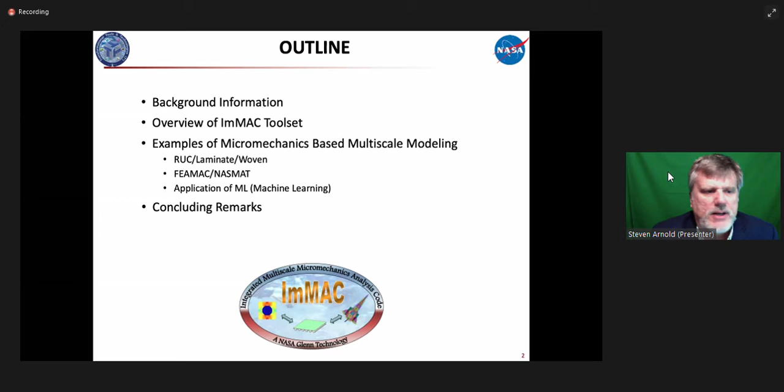According to a 2016 multi-sector industrial survey, material innovation is essential to top performing organizations, as they rated new materials as one of their most important factors in their ability to meet their innovation goals, particularly, as you can see, in the area of performance and cost.

Yet, unfortunately, historical material development times required to move a material from conception to full deployment have been shown to be on the order of 20 years, regardless of the material class. Therefore, in recent years, there's been a desire to reduce this time frame dramatically in order to increase U.S. competitiveness.

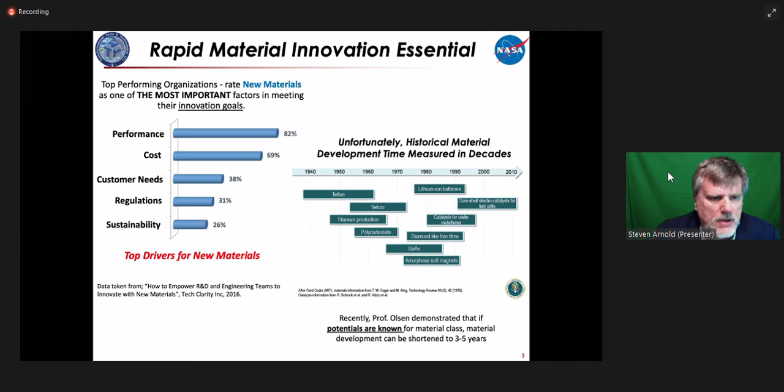To that end, people have turned to ICME over the last 15 to 20 years in an attempt to speed up innovation, since ICME integrates processing histories which influence internal structure, which in turn drive properties, and which then drive performance of the component and structure.

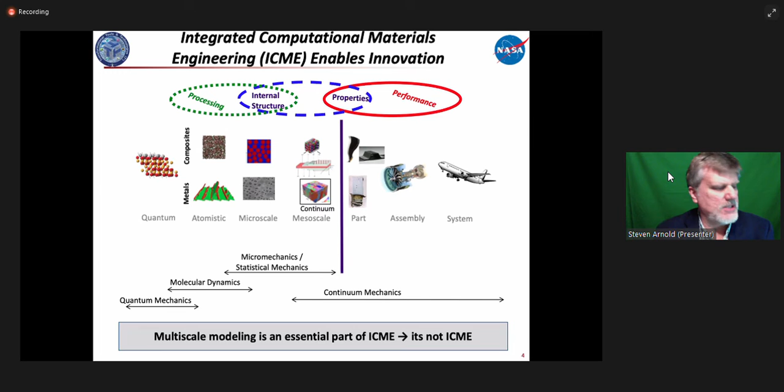ICME is an approach to the design of products and the materials which comprise them by linking experimentally validated material models at different length scales. Multi-scale modeling is an essential part of ICME, but it's not really ICME, in that ICME requires iteration or optimization of the various scale-specific features to obtain one or more engineering performance metrics.

Further, ICME attempts to marry two non-mutually exclusive viewpoints or paradigms. The first is what I term the traditional structural viewpoint, or the design with the material approach, where you're given known properties of the material, and from that you design the component or structure,

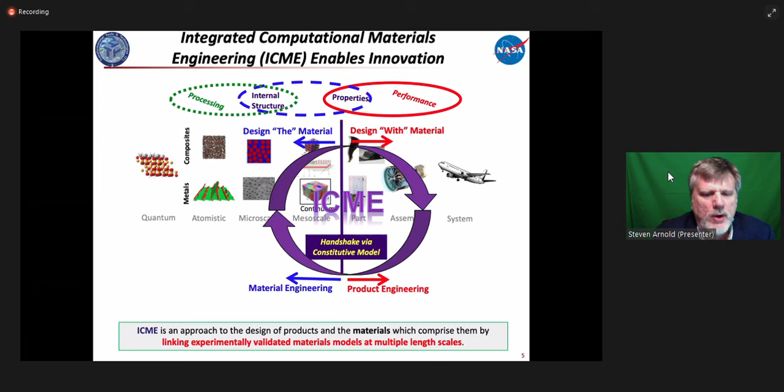versus a more science or material viewpoint, which is the design the material approach, wherein given specific performance requirements, a new material is designed that's fit for purpose. The handshake between these two views is really the constitutive model, and the parameters and properties associated with the various materials then influence the design of the components.

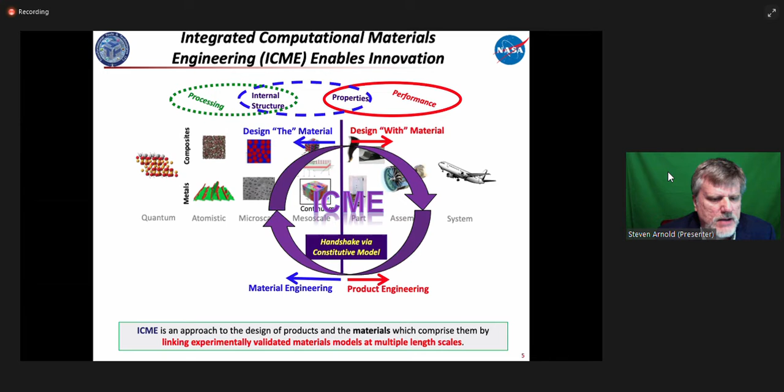More recently, NASA has put together a 2040 vision, which espouses a public-private investment strategy for the design of fit-for-purpose materials and structures. This 2040 vision report is a community consensus document that addresses the technologies required to perform integrated multi-scale materials and structures modeling by the year 2040.

The study engaged over 400 academic, industry, and government experts and aims to explicitly marry the design of materials with the design with materials approaches into one concurrent transformational digital paradigm. The document, which can be found at the URL indicated in the center of the slide here,

describes a cyber physical social ecosystem that impacts the entire supply chain to accelerate concurrent design, development, and deployment of materials and systems throughout the product lifecycle for affordable, producible aerospace applications.

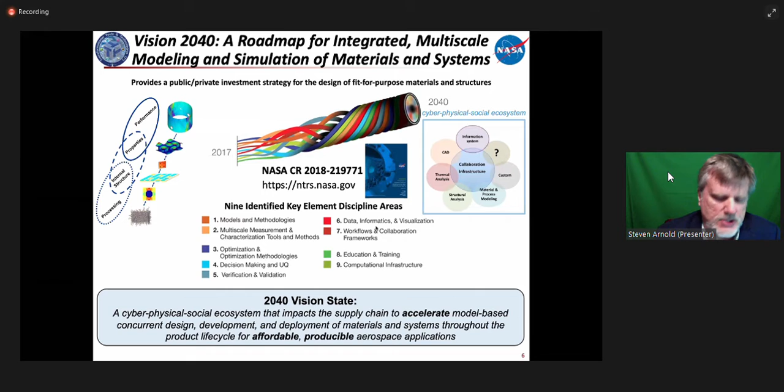Another large investment area in product development is in the area of testing. Consequently, the objective is to build a robust, validated computational framework that can provide accurate virtual testing in order to achieve significant cost savings throughout the development and certification process.

Such a framework is particularly important when dealing with composite materials, as the amount of required testing at levels 1 through 4, as you can see here, is significantly increased. Notice 5x and 100x in levels 2 and 3 over those associated with metallic materials or structures.

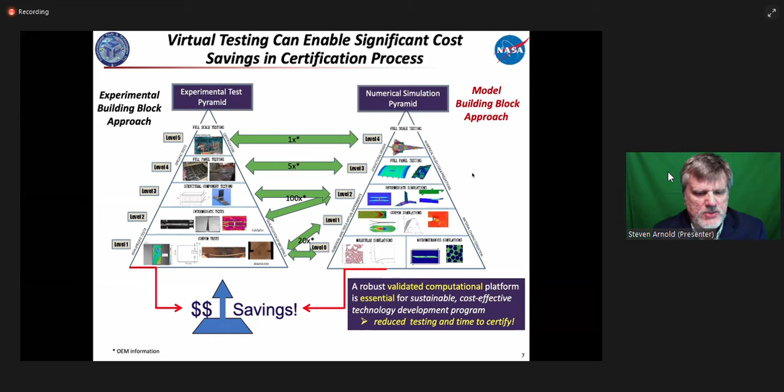So to accomplish this speed up, we really require the development of a new model building block approach, consistent with the classical experimental building block approach, thereby hopefully allowing us to minimize the amount of actual testing required during those intermediate stages of testing, like levels 2 and 3, thus resulting in significant savings of both time and money.

As a result of these motivating factors and many others, NASA Glenn has been pursuing the development of a robust composite multi-scale framework. In particular, we've really focused on the balance between model efficiency and fidelity. Here I'm showing three different categories of multi-scale models.

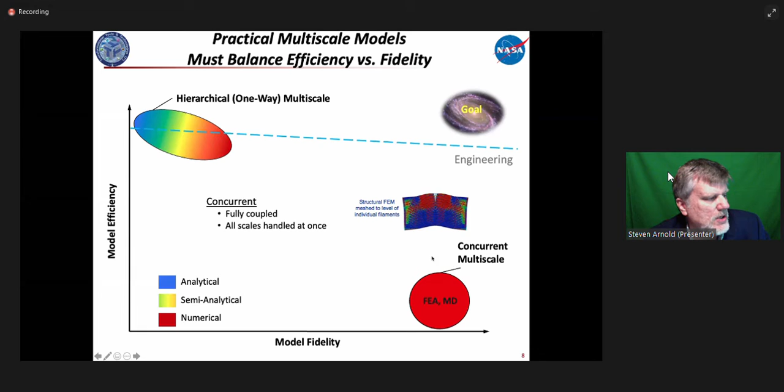The first one here is the hierarchical multi-scale approach, which is really uncoupled. It's one way, either bottom-up or top-down. Typically it's very engineering oriented, where for engineering purposes we're more interested in efficiency and we assume a certain level of fidelity. Alternatively, there's the concurrent multi-scale approach, which is fully coupled. All the scales are handled at once.

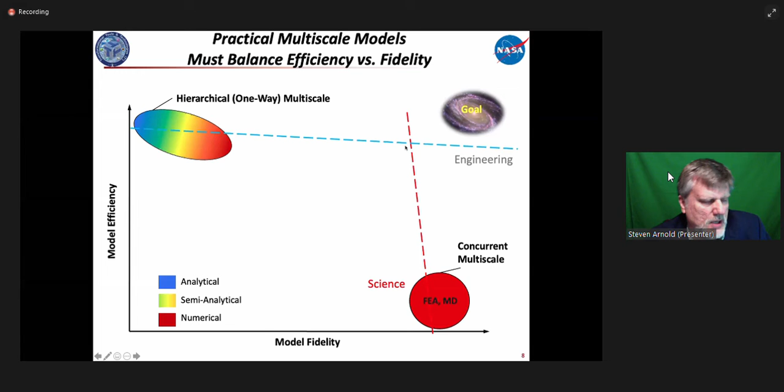And this is much more of a science-oriented viewpoint, where again fidelity is more of the objective, and speed is taken to be a little bit less important. And then there's a third, which is what we have really focused on, and we've termed this the synergistic multi-scale, where we try to take the best of both worlds.

And here we're doing fully coupled, but it's hierarchical in space and concurrent in time. And this is very applicable to the research and technology area. And here I'm just illustrating that in our opinion, GMC or the entire family of method of cells actually is very efficient, as well as has a significant level of fidelity, and serves our purpose.

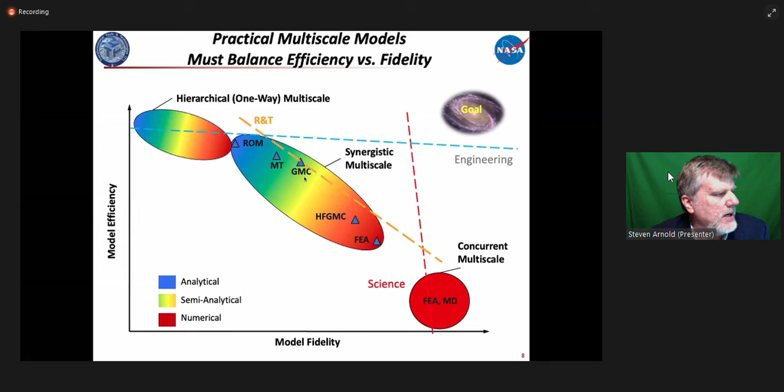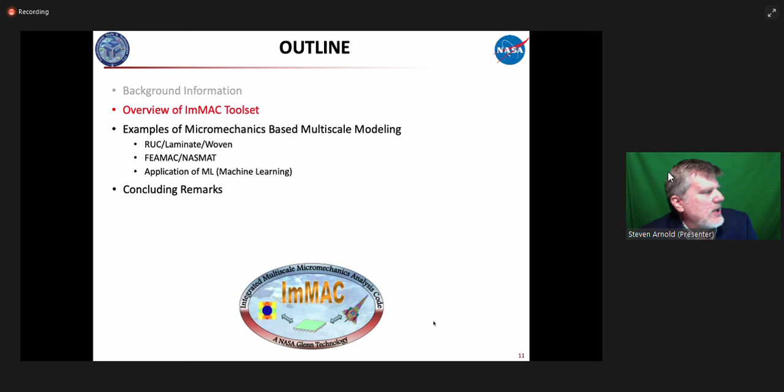So let's just take a quick overview of the ImMAC tool set. Here you're seeing the various scales that are associated with composite analysis. We start at the microscale, the mesoscale, and the global scale, and we're showing homogenization and localization, where homogenization takes you up the scales and localization takes you down. And we're indicating our 4 tool sets here.

We have the MAC/GMC standalone code, which involves classical lamination theory, and it also has a multiscale GMC kind of recursive algorithm built into it. HyperMAC is the implementation of MAC within the commercial software code called HyperSizer, and FEAMAC and NASMAT, as I'll describe later, are the implementation of MAC within a finite element framework.

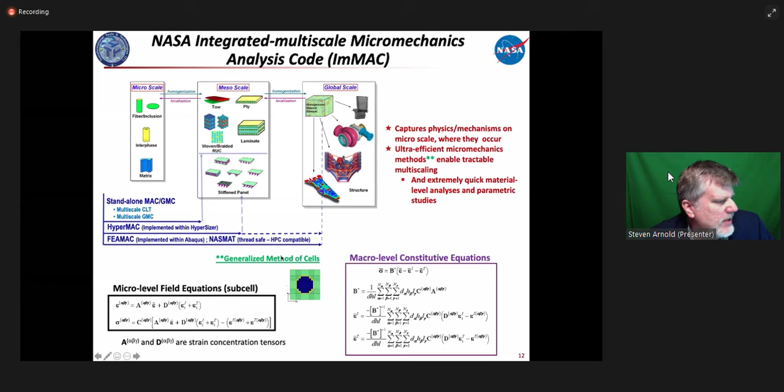And clearly, we have, as I indicated, chosen the method of cells family of micromechanics theories to be the backbone of our multiscale framework. And here we're just showing that the nice thing about this theory is that we have macro level constitutive equations that are semi-analytical, and micro level field equations as well that describe the local fields within the various constituents.

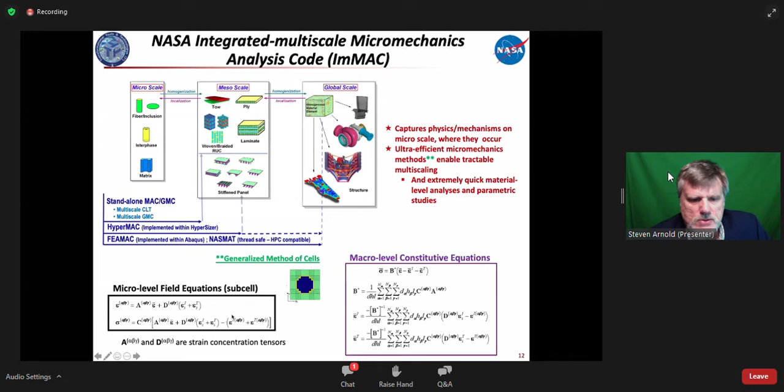And all of these are able to be obtained once we have the A and D strain concentration tensors. Furthermore, an advantage of, like I indicated before, the generalized method of cells is that it admits nonlinear constitutive and damage models. And in this slide we're just indicating that we've built in a large variety of constitutive models as well as damage models within our tool set.

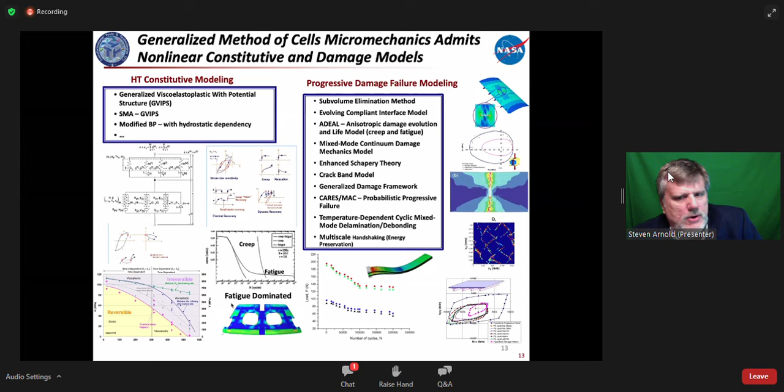This formulation provides constant stress and strain fields in each subcell, and yet because of the discretization of subcells, we're able to pick up gradients within, let's say, the matrix or even the fiber. One of the advantages of GMC, though, is that it has no discretization sensitivity for a fixed RUC, but a disadvantage is that it also has no normal and shear coupling.

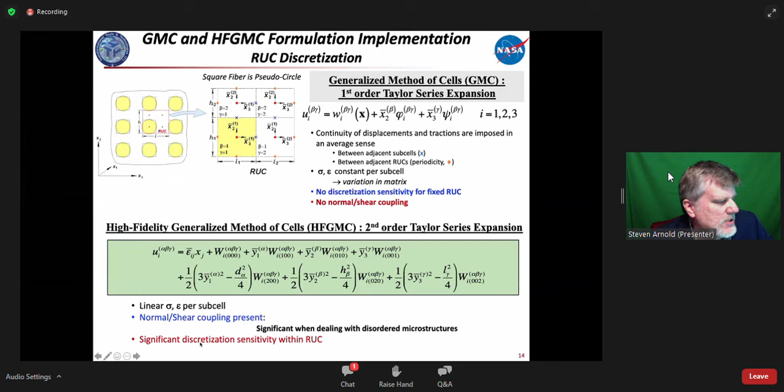Alternatively, the high fidelity generalized method of cells is based on a second order Taylor series expansion of the displacement field, which provides us with a linear stress strain representation per subcell, and actually allows us now to have normal shear coupling, which is really significant when you're dealing with disordered microstructures. A disadvantage, though, of this methodology is that, like finite element, you would have a discretization sensitivity within the RUC.

For more information about the theory and the details that go into that, I recommend you take a look at our 2 books, Micromechanics of Composites, and our most recent book that will appear this summer called Practical Micromechanics of Composites.

And also, just a note, this book is actually going to have a MATLAB open source code that complements it and provides access to Mori-Tanaka, method of cells, generalized method of cells, and HFGMC, and it can be obtained at this link here, which is NASA's GitHub page.

Okay, so just to give you a quick 30,000 foot view, the ImMAC suite, as we said, has a core micromechanics capability. It's very modular. We have both GMC and HFGMC, as well as PHFGMC, which is a parametric formulation of HFGMC, CUF, Mori-Tanaka, and we can even allow any other micromechanics theory to be implemented. And this is done within a kind of a recursive algorithm.

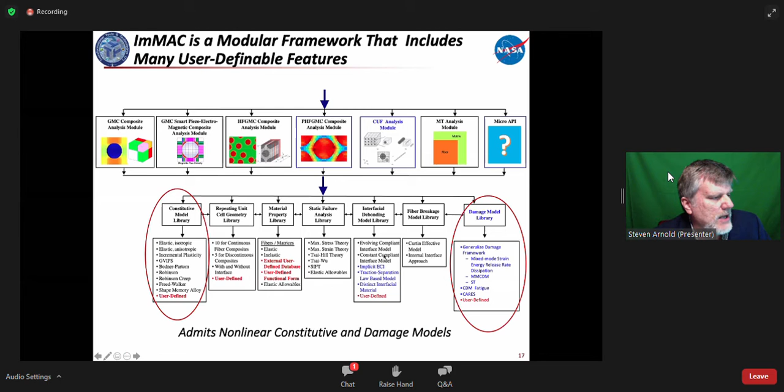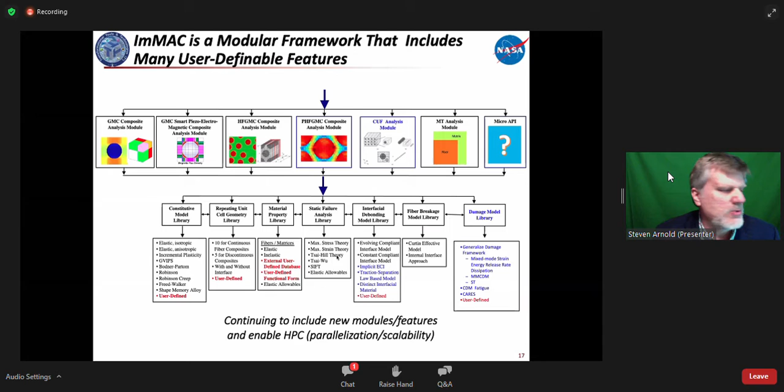And each one of these micromechanics theories can pull from a library of constitutive models, repeating unit cells library, the property library, static failure analysis, interfacial debonding library of models, fiber breakage, and damage models. And we're continuing to include more modules all the time. And our most recent tool works on a high performance compute platform.

The legacy tools now are like MAC/GMC. It basically just calls the generalized method of cells and the high fidelity generalized method of cells, but it can have multi-axial loads applied at a given material point, or you can do micromechanics based laminate analysis with the MAC standalone.

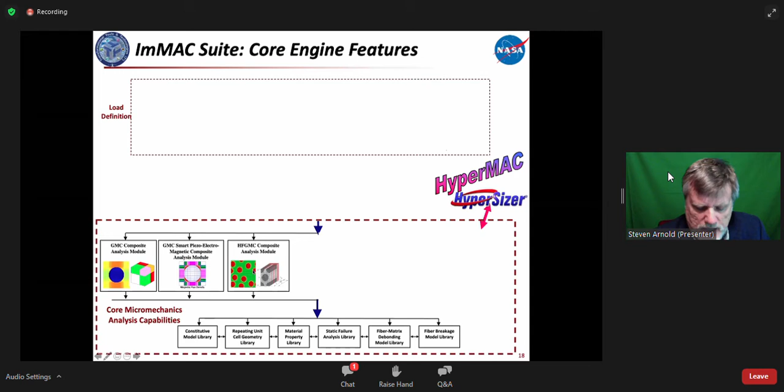HyperMAC, like I said, interfaces with the HyperSizer code, and it basically calls just GMC or HFGMC as options. FEAMAC is our legacy implementation within Abaqus that runs on a single CPU because FEAMAC was not thread safe.

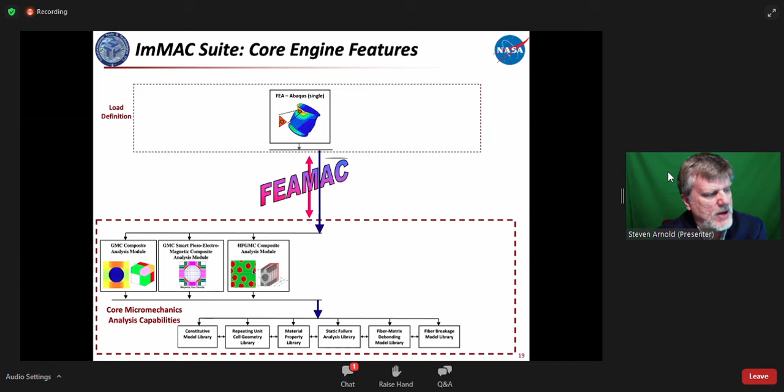And our most recent and advanced tool set is NASMAT. NASMAT can interface with any given third-party software through the macro API. We've so far connected it with Abaqus, SPAF, and CalculiX, which are other finite element codes. And it has the ability, which is quite unique, I think, to recursively engage any given micromechanics theory at any level within the analysis. And you'll see some examples of this coming up.

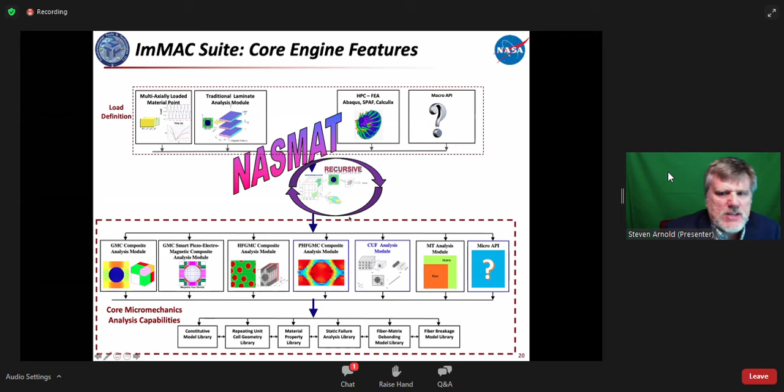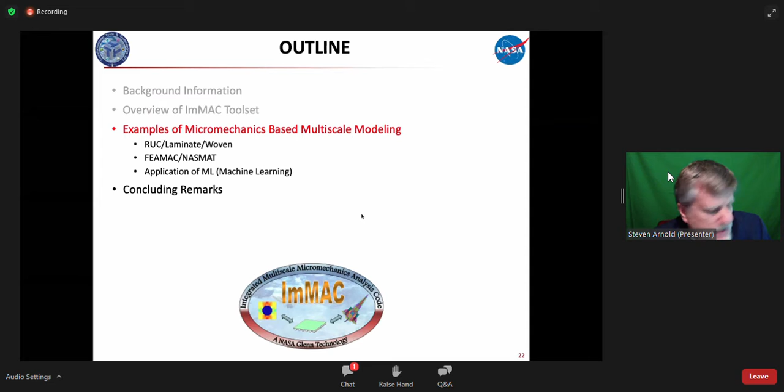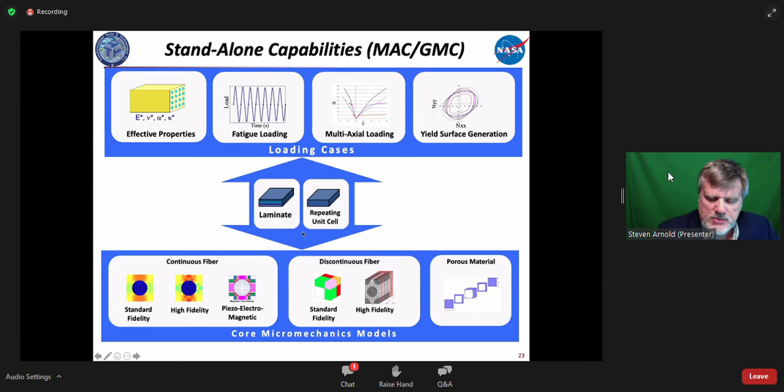Now let's move on to some examples to show you some of the benefits of the tool set. Here we're mainly illustrating the MAC standalone capabilities with respect to laminates and wovens. Although all thermal-mechanical effective property components can be predicted, here we're only showing three, E2, G12, and Nu23, for two different PMC systems, a glass epoxy and a carbon epoxy system.

Here you see the results shown for Voigt, Reuss, Mori-Tanaka, method of cells and three different RUCs using GMC, and all do a pretty nice job. At least the method of cells, Mori-Tanaka and GMC match experiments quite nicely, whereas of course Voigt and Reuss are more on the bounds here.

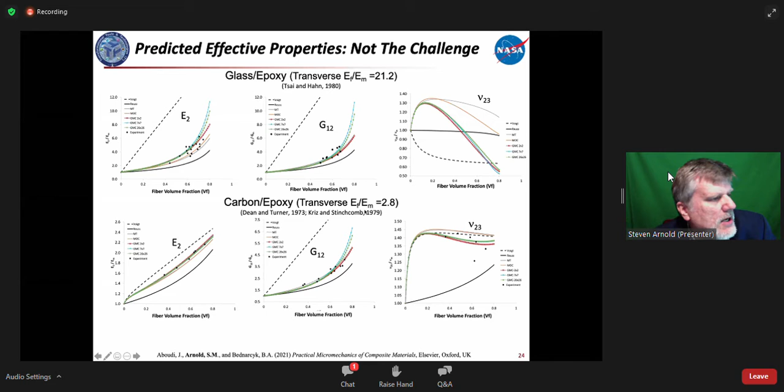Okay, so let's touch on the power of micromechanics, and that is that it provides access to the local stress states and stress and strain fields. Here I'm showing the two invariants, von Mises and pressure, with a finite element representation as well as GMC and HF. For simpler mean field type methods like Mori-Tanaka, you only have a single value in the fiber and a single value for the matrix. But here you can see GMC and HF represent the gradients within the constituents quite nicely.

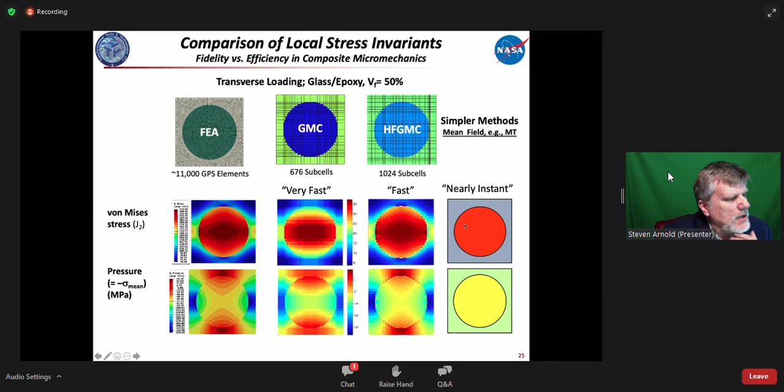And getting back to this balancing of fidelity versus efficiency, here you can see we rank GMC as very fast relative to finite element. HF is fast, and obviously the simpler methods are nearly instantaneous. But again, they only give you a single point value within each constituent.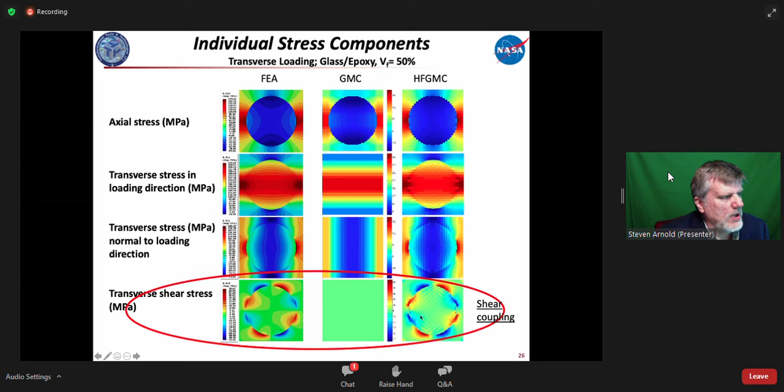And again, we're pointing out here that there's no induced shear stress due to that normal transverse loading. Whereas in FEA and HFGMC, you do actually see shear, but obviously the average of that shear is zero, and does agree with GMC.

So now with those local fields, we get to look at failure and obviously deformation and failure. And here I'm showing initial failure surfaces, which are margins of safety here, and I'm showing it for two different types of problems. Here's one, the SiC/SiC BN system, where the yellow represents an interface material, the BN interface material, and here we're just showing a margin of safety curve.

The green here doesn't have any interface. That is, the yellow's material properties are the same as the green. Here, the blue shows what happens when you do include an interface, and yet you're not allowing it to actually fail. So obviously, because of the compliancy, it's providing you a smaller surface. But when you allow the interface to then fail, you're getting a very sharp failure along that transverse direction.

And it's significantly underneath. But one of the nice things here is you can see the different failure criterions in the different domains, and also we can pick up with micromechanics, because we have access to local fields, which phase is actually failing. Here it's the matrix, here would be the interface.

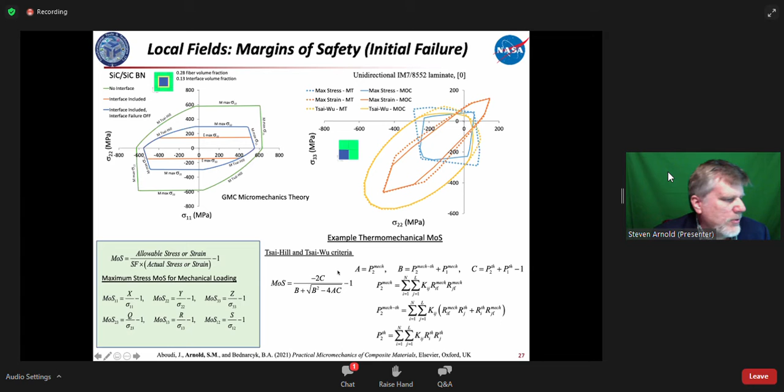And then now here on the right is a demonstration of similar margins of safety curves, but here we're showing three different surfaces, where the blue is a max stress criterion, the orange is a max strain, and the yellow is a Tsai-Wu. And the difference between the dotted and the solid lines is the difference in micromechanics theories, where the dotted are Mori-Tanaka and the solid is method of cells. And we actually have developed full thermomechanical margins of safety as well.

And now moving on, those were more initiation surfaces. And now, like here, we can have initiation, but we can also move beyond that and allow progressive damage to take place, where we allow each subcell to continue to damage, and then the accumulation of that damage ultimately results in, let's say here, the zero-ply failure of a quasi-isotropic laminate.

One of the interesting things, as you saw from the previous slide, there is a difference between failure theories when we're speaking about initiation, but when we get to the final failure and you've had propagation that goes on, the significance of the failure theory selected diminishes significantly.

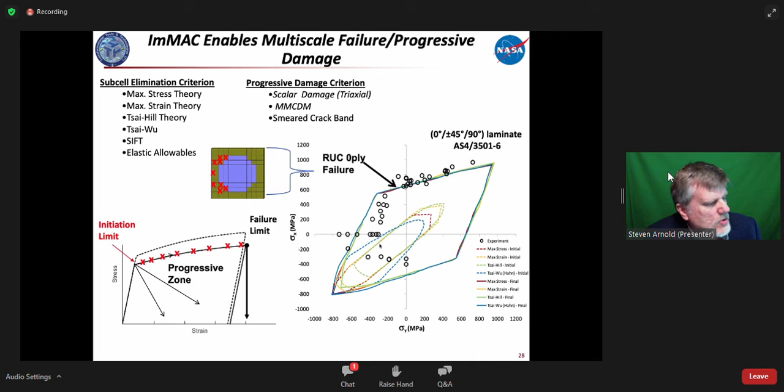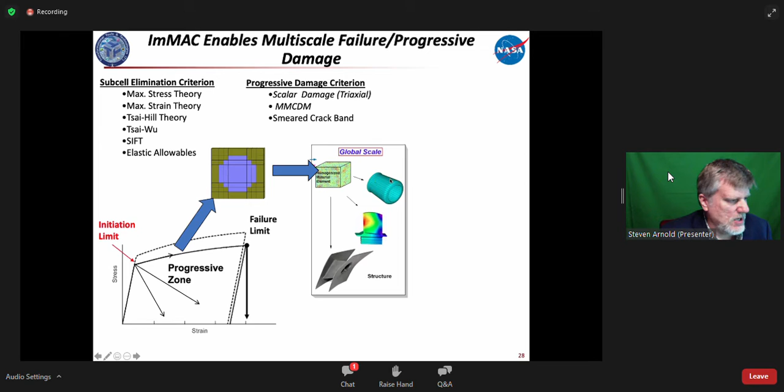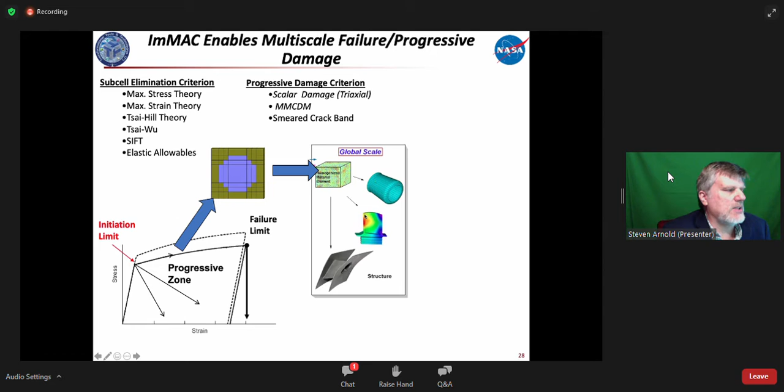And then once we've done this for an RUC, we can take that RUC, plug it in at an integration point within the global finite element solution, and again have progressive damage take place at the global scale, where the finite element is redistributing stresses throughout the structure based upon failure at the various integration element locations. And then the micromechanics is dealing with redistribution of stresses within the RUC due to damage at the various locations within the structure. And this is done iteratively until you can predict component failure.

Here's an example of a progressive failure analysis of a disordered PMC with MAC/GMC, where on the left we're showing the transverse tension of a glass epoxy system, or the mode 1 failure, and you can see the singular crack is able to be predicted. Here's a finite element, and the agreement's reasonably good between the two.

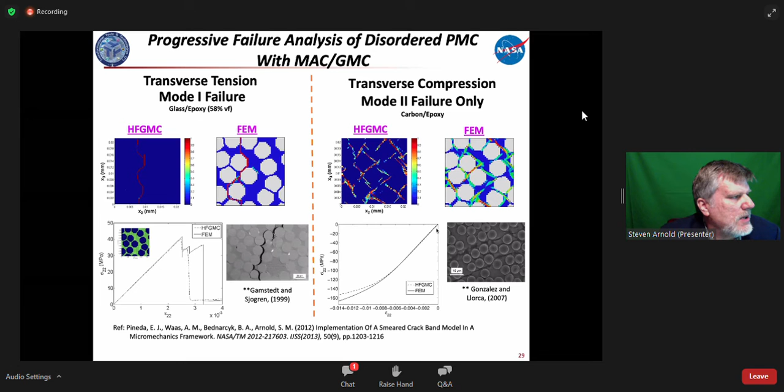And then on the right hand side is a transverse compression case, which is a mode 2 failure, and we're able to pick up the diagonal cracking that takes place under that, and depending upon the disorder of the microstructure, the values change. Here's another example of multiscale modeling of CMC behavior.

Here we're showing two different types of problem. The first is a woven system. The second is a laminate. We've done a significant amount of investigation of the stochastic nonlinear response of woven composites, where we've varied a variety of different features at the local or lower length scales, and observed how they influence the behavior at the structural or global composite level.

And here we're just showing some illustrations where, the nice thing here, you can see the composite would go up, have failure, and then when you unload, you actually come back, as one would expect, at a different stiffness due to the fact that damage is present.

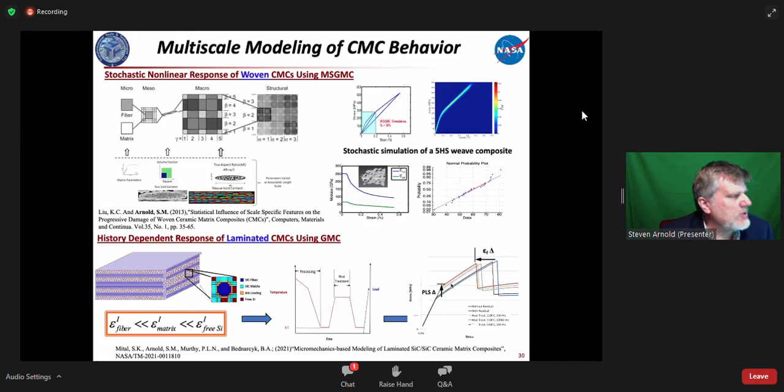Also, a little more sophisticated analysis involving fatigue. Here, we're just illustrating the implementation of a coupled deformation and damage methodology that's cyclic. I think the important aspect of the way we deal with it is we have 2 different types of failure. When it comes to a fiber, we reduce the strength of the fiber as a function of cycles, and we actually allow that strength to plateau and stop due to the saturation of interfacial effects on that degradation of the strength of the fiber.

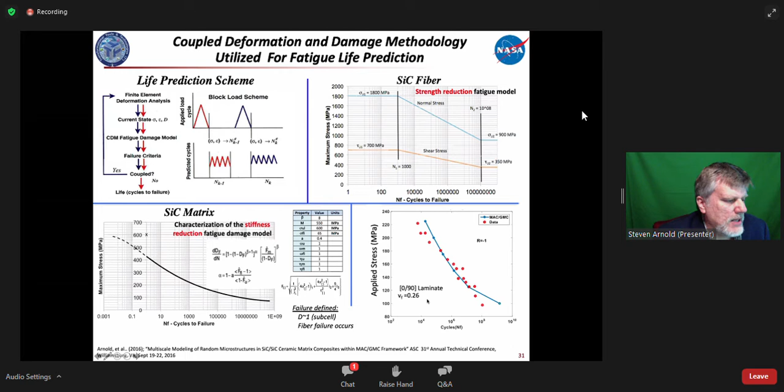And then we also do a stiffness reduction of the matrix, and combining these two, we're able to reasonably accurately predict the SN curve here for a 0/90 laminate at temperature. And then even more interesting is that we can actually go in, and we've done that, looked at the effect of microstructure on fatigue curves. Here we're showing a 90, which obviously is the most severe effect of the microstructure under transverse loading. And we're showing that here we can calculate the full SN curve.

But what's interesting to me here is at any given load level, we're able to actually predict the distribution of the fatigue life. That's a function of various instances of the microstructure. So we've run 100 different instances here. The blue is coming from a 4 fiber RUC. The orange is from a 9, and the gray is a 25 fiber RUC.

And again, keeping with the spirit of understanding the difference between fidelity and speed and so forth, we've also thrown on here the analysis of the same load levels, but this is an ordered system with a hexagonal pack, and you see here that the hexagonal pack is significantly faster, obviously, because it's only one calculation, but it matches the average of the 100 RUCs reasonably well, and obviously it's also conservative.

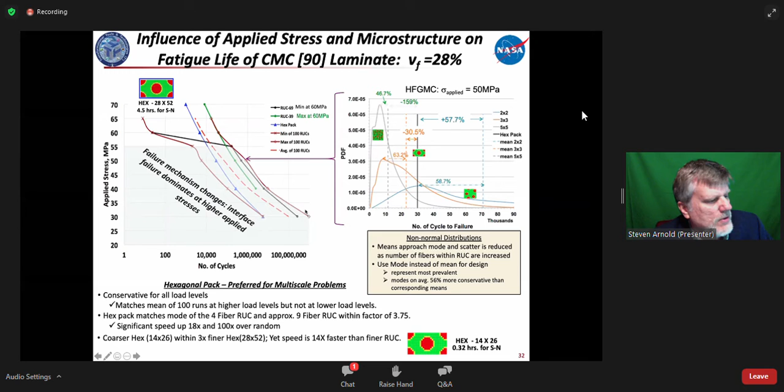And really tying in with this is this idea in the literature. Most people have done studies with microstructure on a 90 laminate only. Here we're looking at what the response is in a laminate situation. In particular, here is a 0/90, and you can see that the variation here is actually reduced quite significantly due to the presence of the zero ply, and in this case it's 62 times less variation in a 0/90 laminate. So that's something to really keep in mind from a practical standpoint, that more than likely, at least for laminates that are dominated by the zero ply, you're not going to have to worry too much about the microstructural details.

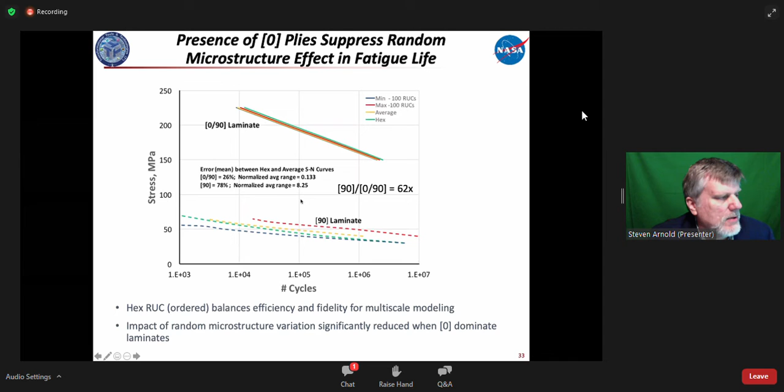Here's another example that we've done with respect to predicting woven carbon phenolic TPS material properties and being able to try to design a better composite for that environment. This was a four-level analysis.

And what was interesting here is we actually used first principle results for the properties of the various constituents, and then looked at a fairly detailed RUC, and we were able to predict the modulus for both in plane and out of plane quite reasonably relative to the experiments over the full temperature range of 500 degrees here. And we're also able to predict the in-plane thermal conductivity and the through thickness conductivity as well.

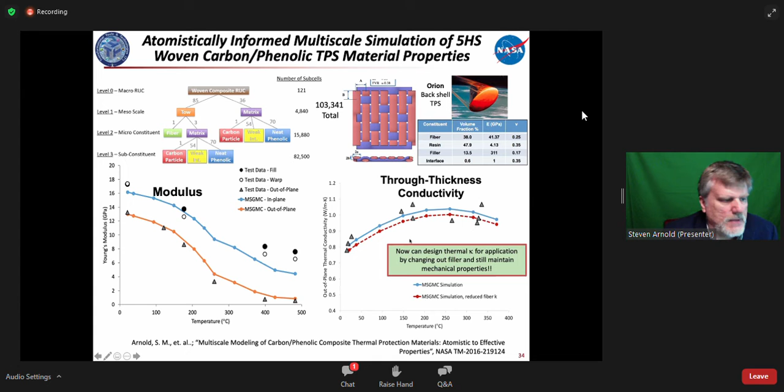So moving on to now full integration within the FEA software. Here's just an example of an MMC that we did a number of years ago where we're looking at strength distributions. And here there's no strength distribution spatially, so that the strength is the same throughout the entire specimen. And clearly we missed the prediction with respect to experiment.

But when we took into account the statistical variation of the fiber, in that we spatially varied the strengths of the fiber, we are able not only to predict the value of the overall failure of the coupon, but the location of the failure was also able to be predicted quite nicely. And the lesson learned out of this was, when you start taking into account distributions, clearly you need to be careful and not impose symmetry boundary conditions or whatever, because that would bias your predictions significantly.

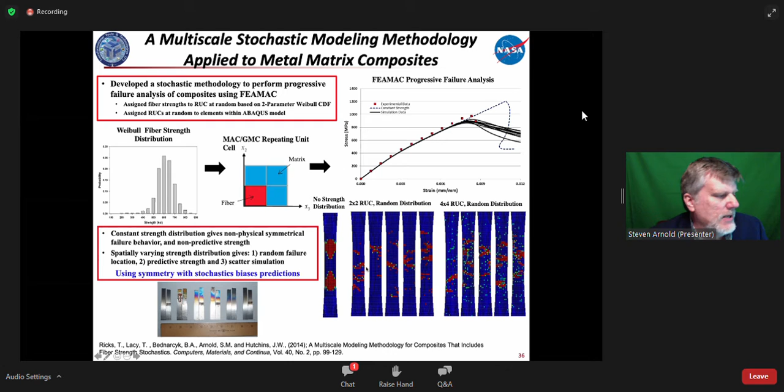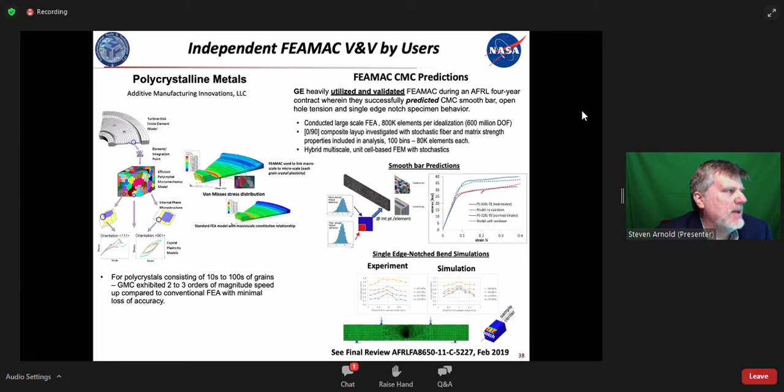And you might notice here, too, they were getting up into 600 million degrees of freedom problems, and obviously this would take a very long time on a single CPU, and this was one of the impetuses that we had for developing NASMAT. And NASMAT is our HPC multiscale analysis tool. It's a complete redesign of our prior FEAMAC implementation. The memory is changed. The whole modular design has been changed, and it's much more plug and play. It has a lot more user functionality. It's better maintainability and upgradability, and of course, it's high performance.

And with that, we had to make everything thread safe so that it could work within a high performance computing environment. Like I said earlier, it does allow us to have implementation of multiple micromechanics methods. So we're moving even beyond method of cells family. We've implemented Carrera unified formulation and the Mori Tanaka method as well. And I think one of its claims to fame here in the future is going to be this seamless handling of the multiscale recursive micromechanics, so that any of these micromechanics models can be called at any level of scale. Also, we're moving to these application program interfaces, which allow us to integrate with third-party micro and macro mechanics codes. And like I said, the real point of NASMAT is to give us the ability to do industrial scale problems.

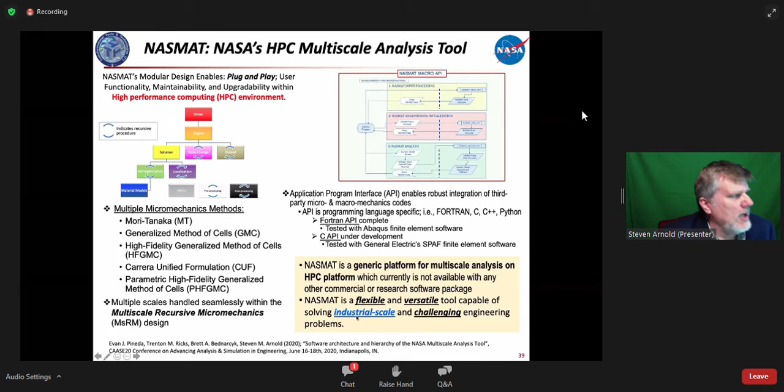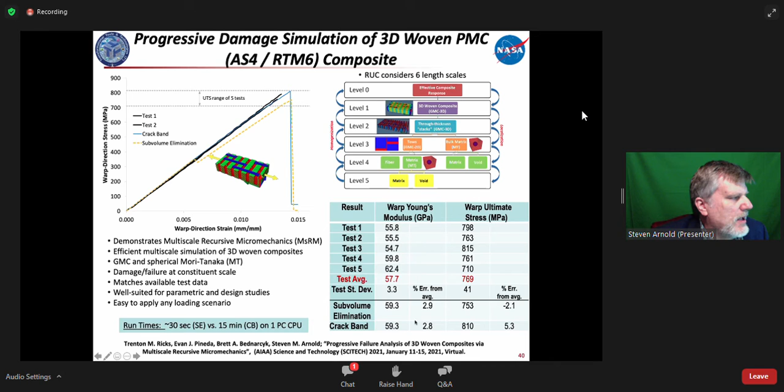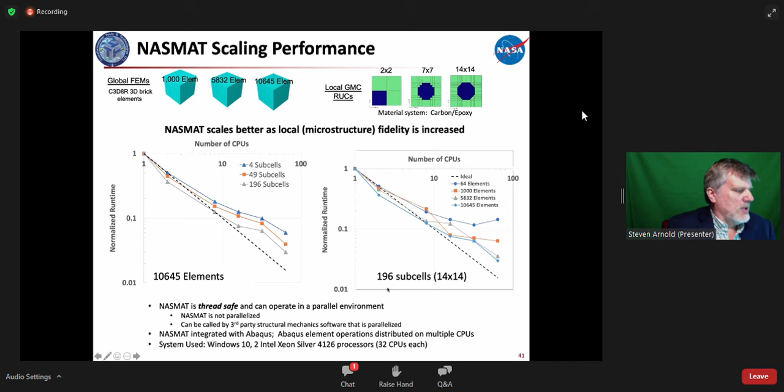And here we're showing that once we get above a certain global discretization, it doesn't really cost us that much more to continue on and do additional elements. So that's the end there of NASMAT.

So these 5 features were matched. We ran tens of thousands of cases with MAC/GMC for different constituent properties, different volume fractions, different laminate layups, and trained this neural network model to represent the physics-based model. And we showed that we could do this within 98% accuracy, but 10 to the 6, six orders of magnitude faster, which was incredible.

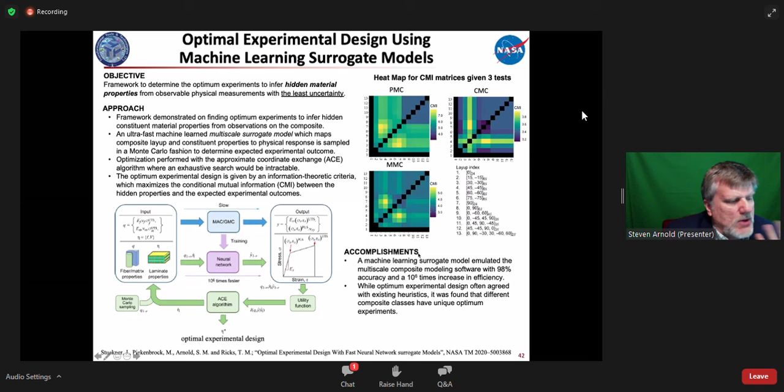Basically, what you're seeing is that the specific laminate layup that would give you the best result is different depending upon the system, as one might expect. After doing this, we decided to model a ply instead of the entire multiscale. And instead of just 5 points, we wanted to map the entire stress-strain curve. So Josh went off and developed a long short-term memory neural network model to represent MAC results.

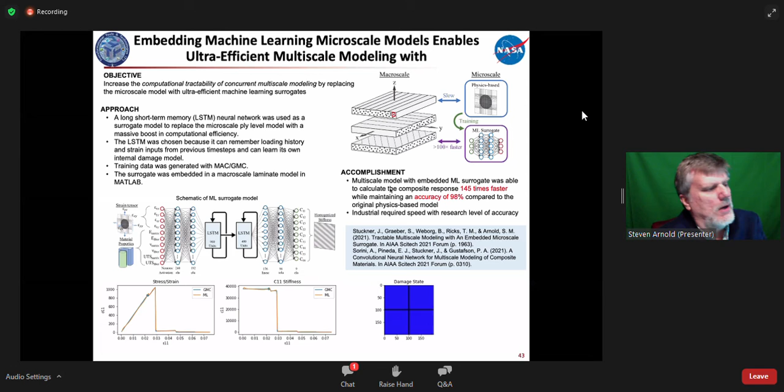After training, we were able to show that once again we could accurately predict the response that corresponded to what we got from MAC, but at 145 times faster speed. So 2 orders of magnitude increase, where we embedded this surrogate model into a MATLAB lamination formulation. This is very encouraging and very promising. We're now in the process of working to implement this ML surrogate inside finite element.

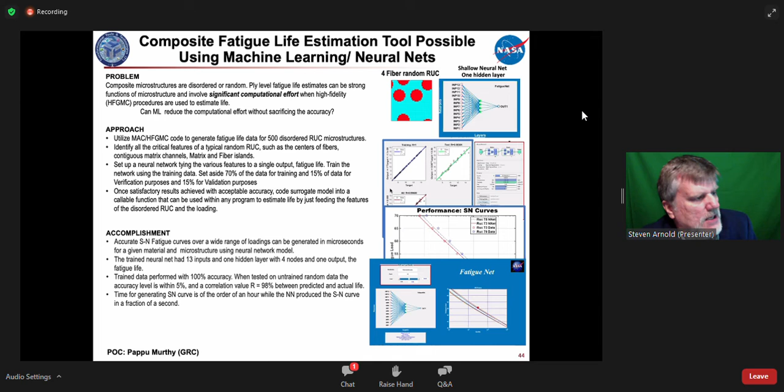And finally, as a final illustration, think about the thousands of hours it would take for us to compute fatigue life. We're now in the process of developing a composite fatigue life estimation tool, so that in microseconds we can produce a stress-strain or an S-N curve for different laminates or different microstructures, or the combination of that, and provide a designer with an estimate of the fatigue life. So that's another project that we're currently working on.

So in conclusion, efficient design of the material can be obtained and is required for utilization of composites, particularly when we want to understand the mechanisms of failure. And we believe that the ImMAC Suite is an efficient and accurate nonlinear deformation damage framework for the design and analysis of composite materials and structures, for the following reasons.

A really nice one is this ability to do what-if scenarios, so we can better innovate and come up with better fit-for-purpose materials. And obviously with industrial-size problems now, being able to do that is really a big plus for us at this point.

And then finally, integration of machine learning surrogate models we think are going to enable multi-scale modeling at industrial required speeds, yet with research level accuracy.